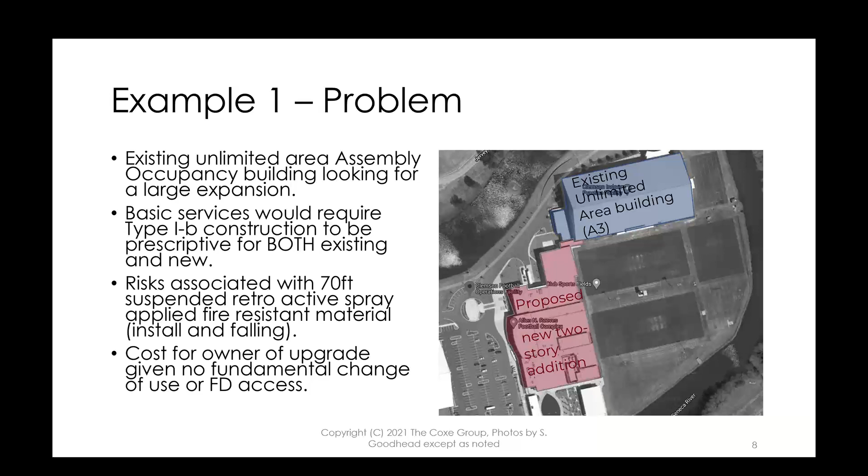The contractor asked the question, hey, how are we going to get the fireproofing applied to the 70-foot high space? We've got to upgrade that. Or we end up having a separation between the 2 buildings. There's lots of downsides to that from the football operations facility standpoint and the coaches' requirements. And so the question got asked, is there a way to treat both buildings as type 2B, even though they're assembly? That was a really interesting question.

This particular project had HOK and Goodwin Mills Cawood as the design team, and they were looking at it originally through the lens of all of the regular progression of what you would expect to see from a code base standpoint. They then said, hey, what would it take to try and get this to be type 2B, unprotected steel for the existing building and unprotected for the two-story addition?

And it was a really interesting question because it's not related to fire. When we start talking about height and area, it's realistically the people who are within the building getting out and the fire department needing to get in. And so what we really needed to do was think about it from the people who are unfamiliar with the building, those occupants who might be visiting or there for a large scale event within the practice facility.

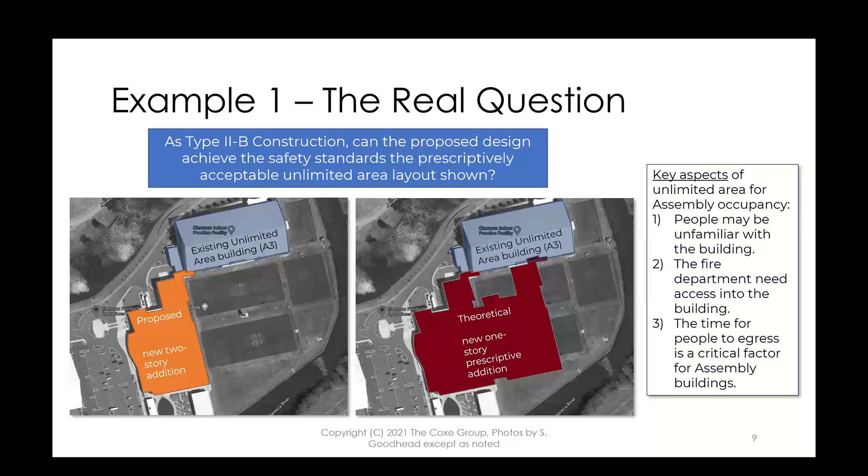How long does it take them to get out if this was a two-story addition versus a one-story addition, which theoretically could be unlimited area? And so if we look at it through that lens, we suddenly find that we need to think about the student body and the overall faculty and the sports players, the football players that would be involved within the space. And so if you go and gather that data, and if any of you have paused to watch the students move about within any of your campuses, there's some really fascinating things which pop up.

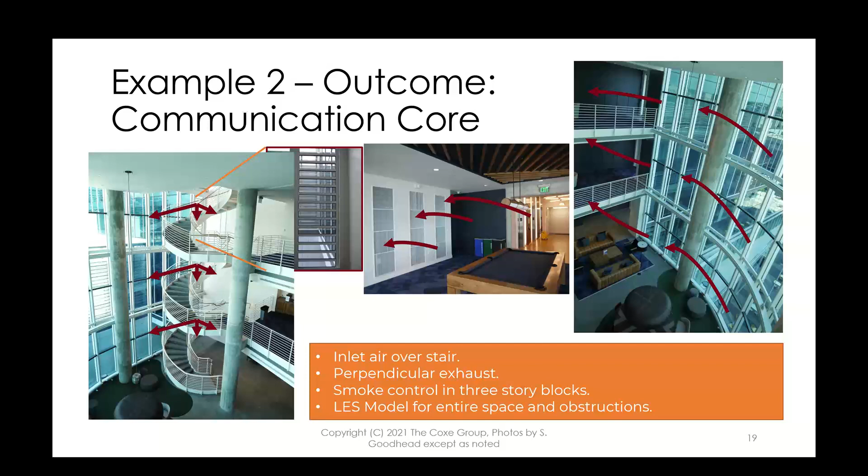Looking at it from a holistic standpoint also meant, and you can see here past the pool table, that the elevator lobbies, which are required here in Georgia, went away. That meant fire doors, smoke doors. We also managed to think about how to decrease the overall exhaust rate. And so it became a very, very efficient system. And it achieves that primary objective of having that collaboration core open.

The very deep basement also required a smoke control system because it's here in Georgia. And in actual fact, by overlaying the mechanical system requirements for carbon monoxide and nitrogen dioxide and looking at it through a truly collaborative basis, the smoke control system ended up being able to provide a much more efficient mechanical exhaust system for the carbon monoxide and nitrogen dioxide. And that meant several things happened. We could remove one of the firefighting stairs because we could demonstrate the level of safety in the basement.

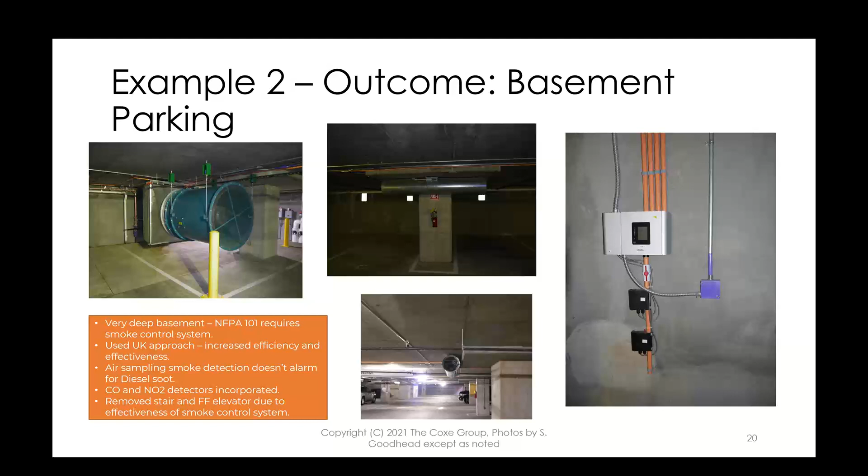We removed a staircase because we could increase the travel distance, and also made the exhaust shafts more efficient for the mechanical system, with a total savings somewhere, well, we'll come to that in a second. But we can see the jet fans here running, and all they're doing is redirecting smoke and moving it through the space in a very purposeful, very direct manner, rather than just arbitrarily moving air across the entire body. It's a very directed approach.

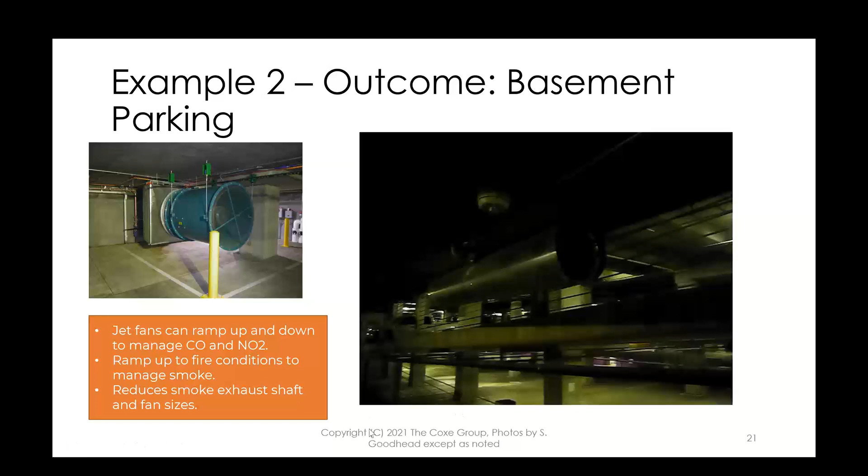Added to that, sorry about the picture here, but added to that, we've also got the 72 hours of diesel sat there within the basement. Let's see if we can move that over for you. You can see here that each of those doors holds behind it 3,000 gallons of fuel. There's then special piping through to those spaces, and then additional separation from unit to unit.

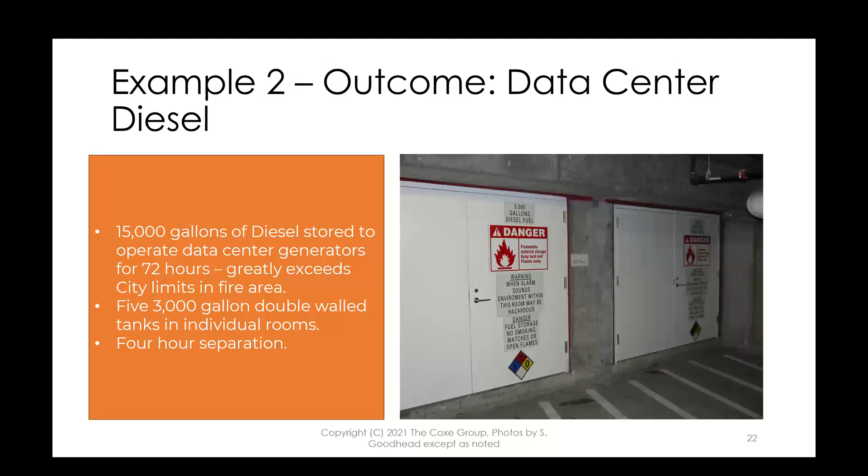That was a very important piece of the puzzle to make the data center able to work from a backup power standpoint. The big things with this was the authorities having jurisdiction. It took multiple meetings and it took coordination between city, state, the owner, the developer, and also the design firms. And it was by being involved early, and the trust and communication ensured that there was never any gotchas.

The AHJ for this project was incredibly proactive in ensuring they reviewed and understood some of the very technical aspects that, quite honestly, haven't really been used in the US very much at all. Overall, the understanding is that there's about $3 million savings for the parking deck and probably about $500,000 of savings for the atrium. Those two things, again, would not have typically been seen or been possible by following just a basic services type contract. This is a bit different because it brings in that private developer into what would otherwise be a university-led project. But the university was really driving the need for the development through their foundation.

Let's take a look at extensive renovation. This is BNIM and Praxis 3 for the Crosland Tower and Georgia Tech Library. It was a very interesting project. 1950s-ish era for the library, a little bit later for Crosland Tower. And because of the extent of the renovation, both buildings were essentially required to be treated as new from a fire safety standpoint. All of a sudden, that meant introducing pressurization systems. We've got to try and maintain the gorgeous ceramic tiles within the staircase, levels of detail that were going into maintaining handrails and window framing systems.

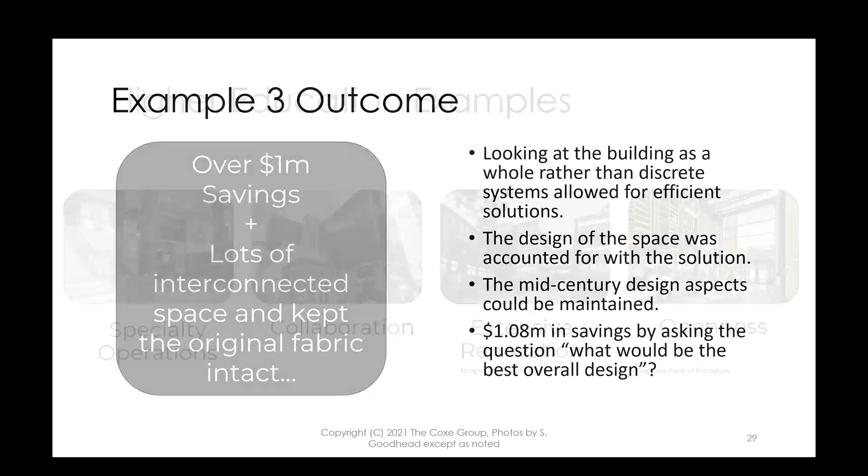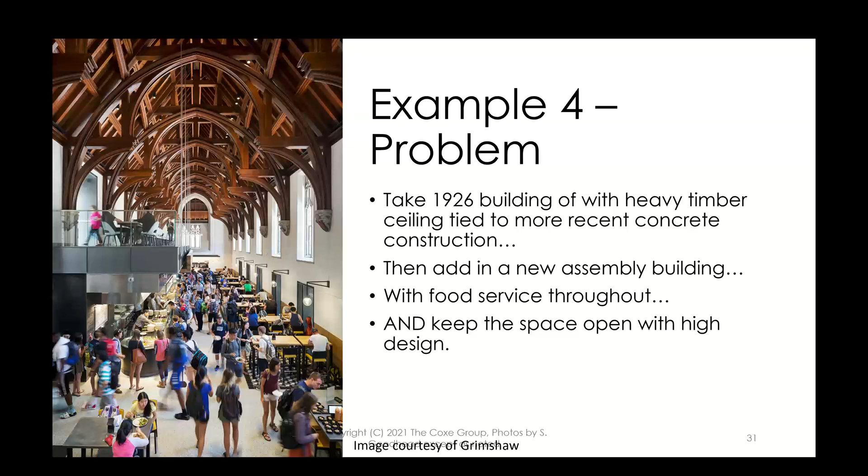And so one of the questions which was raised, and this is really from a design standpoint, the preference would be to keep the steel unprotected. Yes, that's got a cost reduction, but it was primarily being driven by a design preference and a design enhancement. There was a very strong desire to keep the atrium completely open to the 1920s structures. That openness was there for the overall flow and connectivity of the spaces, so it didn't close off the old from the new.

There was a need for a very efficient smoke management system to reduce construction costs, but also reduce the structural load of the roof of the atrium. And of course, there was always the chefs that wanted the solid fuel burning equipment. I think the one that sticks in my mind was the wood-fired pizza oven. And I seem to remember there was a tandoori oven and a barbecue pit. So we also need to think about those things from a fire safety standpoint.

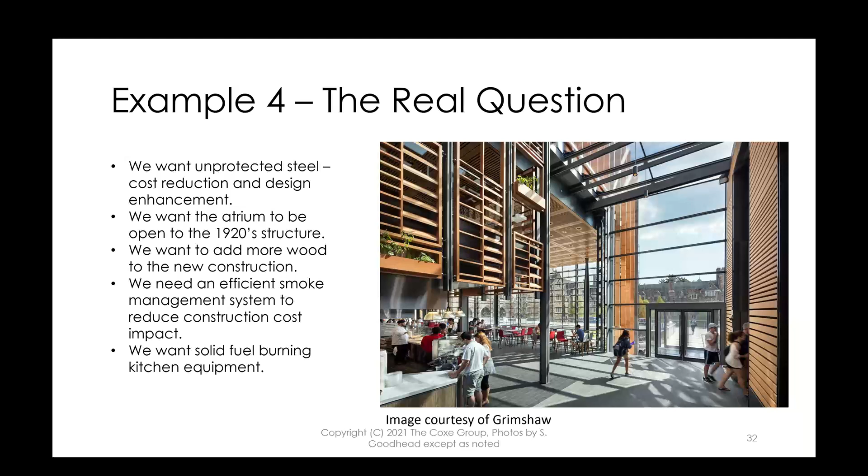One of the most obvious is, let's accept that there's that fuel in there and that could be an ignition source. Under controlled conditions, though, it's not necessarily going to contribute to a fire. So how do we maintain the balance with the design and the intended use of the building? In terms of how to approach this design, again, Grimshaw did a great job here recognizing that basic services from the specialty consultant wasn't going to get to where they wanted to be. And so a very holistic approach needed to be considered.

Who are the users? Who's going to be in the space? That could be faculty, it could be students, it could be visitors of students. This is a pretty significant epicenter for food within the side of the campus. The question comes up, how many people will be in there? Well, we can follow the prescriptive requirements of the North Carolina Building Code, and we understand how many people there are. Except, is that how the building's going to be used? In reality, are we actually going to be dealing with more people or fewer people? What is the right number and what's the right distribution? How are the different spaces being used?

And also, sounds a strange question, but how open is open? Some of these spaces probably are going to start tripping into some of the aspects around mezzanines, or maybe we need to have, from a design perspective, something completely open to the atrium space. And there's other things which we can truly enclose and move away from the atrium space because of efficiencies in the smoke control system. You can see on the right-hand side of this image the, I think it was 1940s portion of the building, which was a lot harder to deal with, actually, than the 1920s structure, which is in the foreground at the back of the photo there.

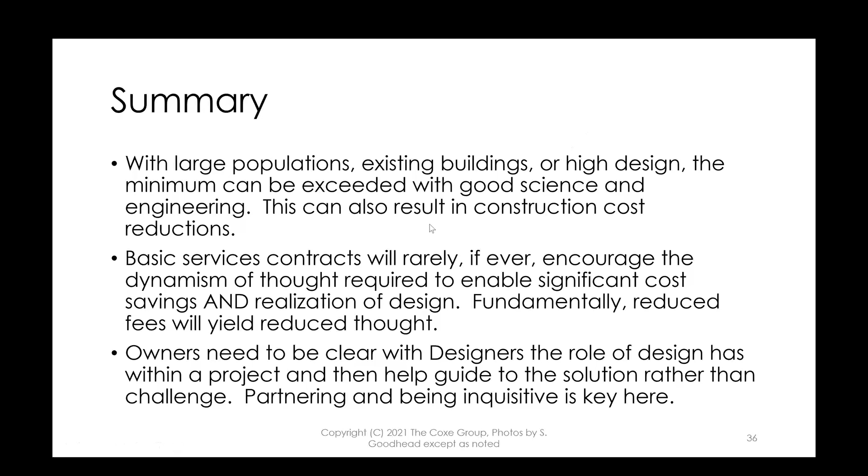Okay, Simon, we have a couple of questions for you. First one, how was the lighting concern solved, such as task lighting, security, or exterior lighting that could tie into the fire code concept? Billy, it sounds like you're saying lighting. Yes, lighting, like light bulb on and off. Okay. How was the lighting concern solved, such as task lighting, security, or exterior lighting that could tie into the fire code concept?

Well, I don't know much about lighting, but that would be another example of the specialty consultants, lighting consultants, of course.

In many instances, the automatic assumption from a fire safety standpoint is there is no lighting, or the lighting is the minimal that you'd expect to see with the emergency lighting provisions. And that's within the building, but all the way through the exits and the exit discharge through to the public way. If it goes beyond that, that's great, but it's not necessarily something that designers can hang their hats on.